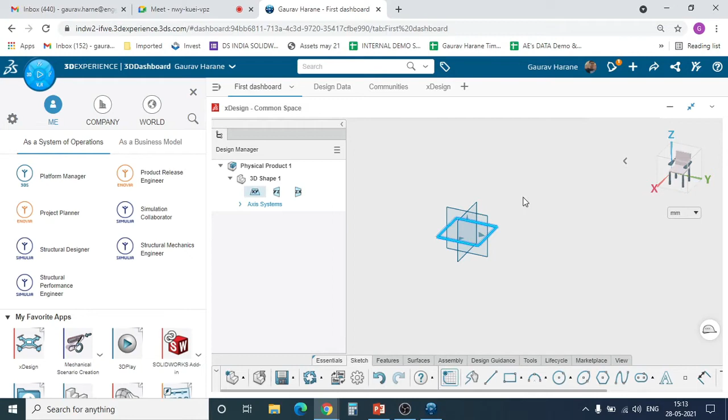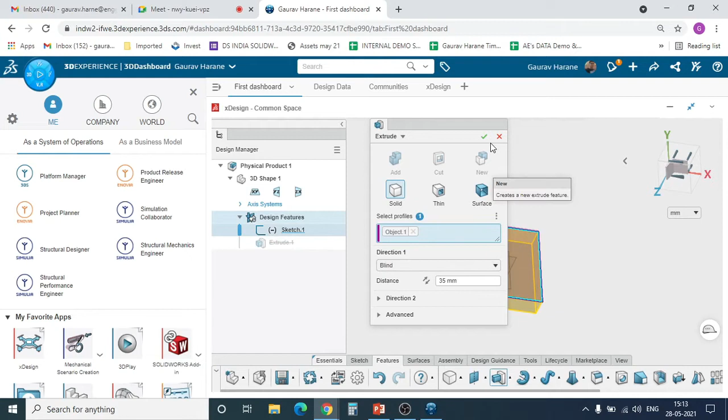You can upload your SolidWorks documents or parts to the platform, or you can create your part on the platform, download it and use it in the desktop, correct? So this is as easy as using SolidWorks. With all the features available over here, you can make use of all the commands, correct? And finally you can save it, or export it and use it in your desktop SolidWorks.

There will be a drive created on your desktop. Let me just open the drive. Over here we can see this is my drive of Engineering Technique. Anything that you copy and paste in this drive will be automatically uploaded to the cloud, right? You can just drag and drop any component that you want to preview. If you want to give any markups, you can do that, correct? You can play with the 3D Play app which is available to preview your component.

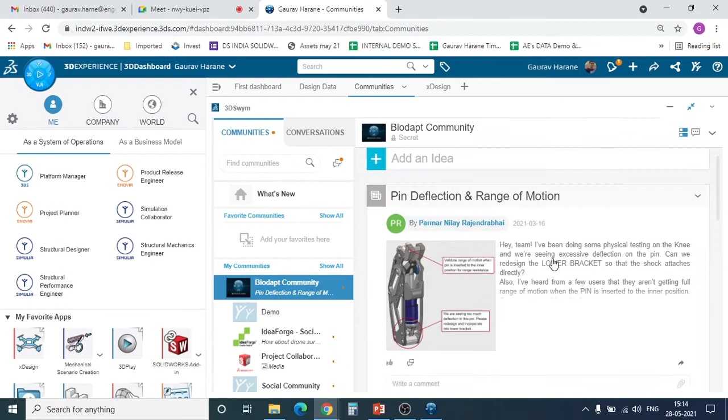You can also create various communities and share your thoughts with your colleagues, right? So these are various communities that were created. So the advantages are endless. Let me just jump on. Now we have seen the overview of the 3D Experience platform and how it will answer our queries while we are working from home, correct? By connecting everybody, every aspect of you, to the cloud.

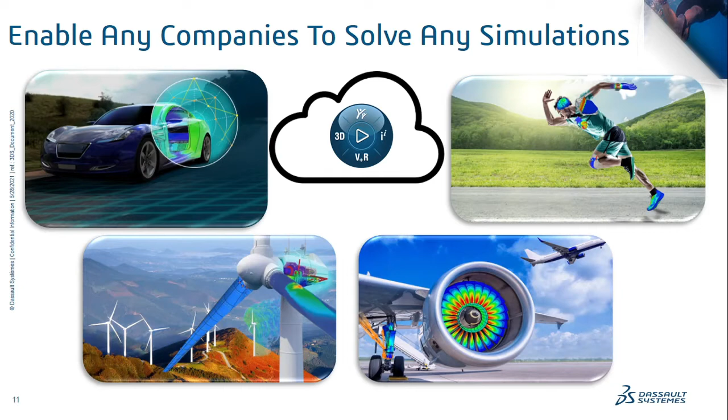Now SolidWorks Simulia represents the simulation category of the 3D Experience Works portfolio. We have seen there are 4 categories, out of which Simulia, which this webinar focuses on today, is covered under the simulation category. The goal for simulation is to enable any company to solve any simulation. Based on cutting-edge and leading technology, with Simulia all types of problems can now be solved by all types of users, whether a novice user just starting to do analysis, or an expert analyst. They can make use of the software and do their job.

Now, the market trend has never been stronger for simulation. It has been proven across the broad design, engineering and manufacturing industries that simulation helps launch new products to market faster, correct? I hope this is true, that simulation has helped most companies launch their products faster than those who are not using the tool.

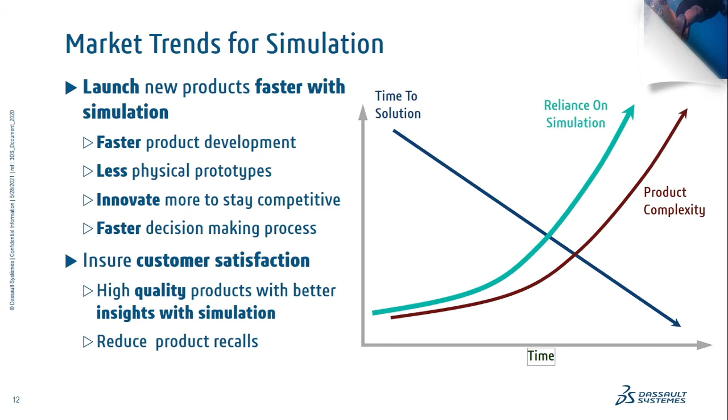The benefits have been proven and are multiple, like faster product, less prototyping and more innovation. Another key factor is customer satisfaction in providing not only innovations but high quality products, correct? Nowadays any product manufacturing company without the design department is not fulfilled. Likewise, with design department, the simulation or the analysis department is also very important, correct? So while designing, we analyze the component and then we take it ahead for the manufacturing.

Let me check. Yeah, okay.

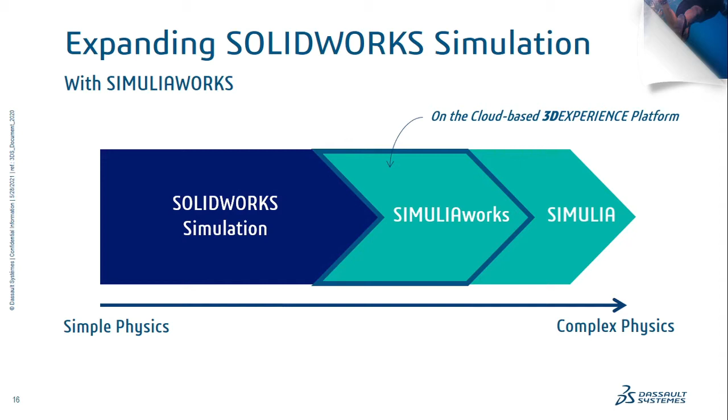Now physics complexity may differ, right? Starting from static, dynamic analysis, right? If you are interested in implicit or explicit, the types of analysis are different according to the physics complexity, correct? So there are various types of analysis starting from problem time magnitude to its non-linearity. The creep test which occurs over a long period of time, to hypervelocity or impact analysis, which is highly explicit in nature and which takes microseconds, right? So the non-linearity is different at each and every level.

So accordingly, different methods were generated according to the problem time magnitude, which are divided into implicit methods and explicit methods. So the explicit methods occur in less than a second of time, correct, like bullet impact analysis or detonation and blast or drop and impact analysis, which occur in a split second of time. While implicit analyses are our regular static analysis where the time duration is large for its occurrence.

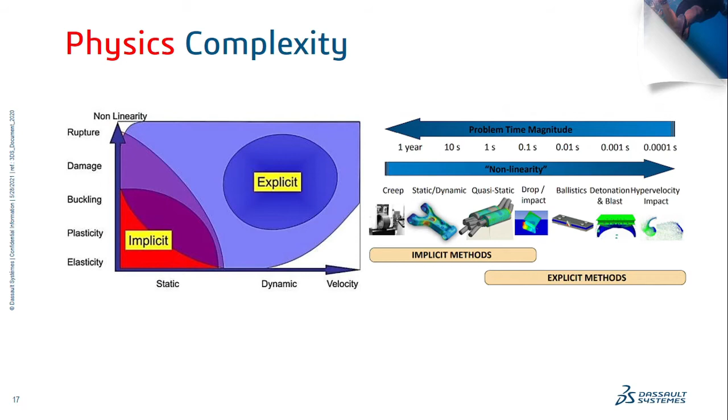Now, coming back to Simulia, let me just jump on to my platform over here. So according to the need, over here, if I select the Simulia role, then we have different apps available according to your need. And one of those apps is our structural mechanics or structural scenario creation, wherein you can create your analysis or set up your models and check the results.

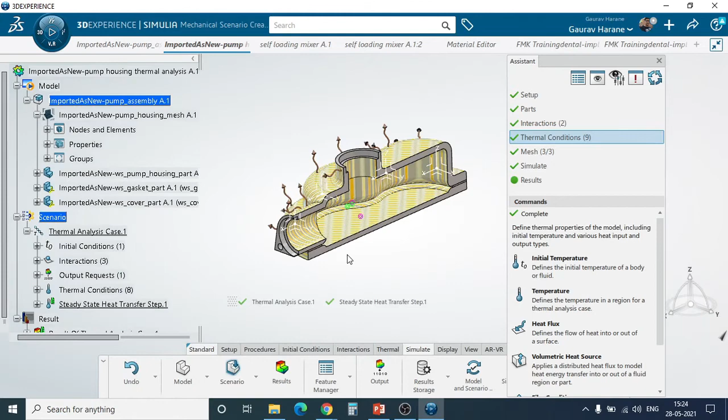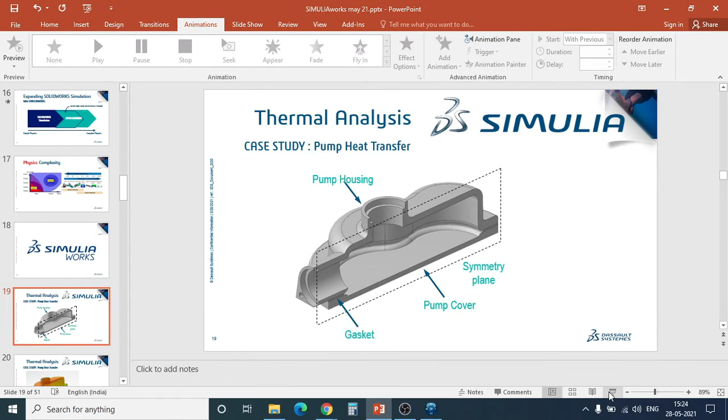So you can import not only SolidWorks but other neutral file format models also, taking an example of this thermal analysis. Now this is a gasket manifold, which primarily deals with the thermal analysis part. So over here you can define various boundary conditions starting from temperature, heat flux or heat source. All the modes of heat transfer, conduction, convection and radiation can be taken care of. And you will get the results accordingly. So this was one case study of pump heat transfer.

Now if we talk about a few more case studies or examples that can be done, take an example of this analysis of a self-loading concrete mixer arm, which is at the back end. So this is an automated vehicle in which the concrete can be poured into this rotating drum automatically. So let me jump on to my platform.

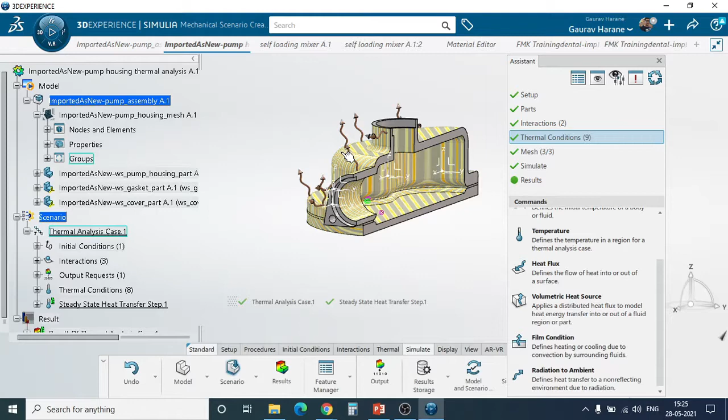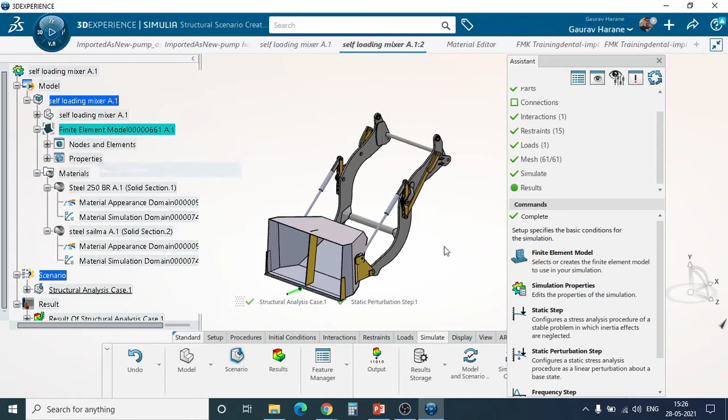So I have just taken the section of the arms where I am interested to check the analysis. And then you can set up all your boundary conditions. We have this very good assistant available, which will let you know whether everything has been done, whether restraints are applied, loads are applied, materials are applied, mesh is done. So if I just highlight the mesh for you, we have different meshes available starting from hex, tet and so on.

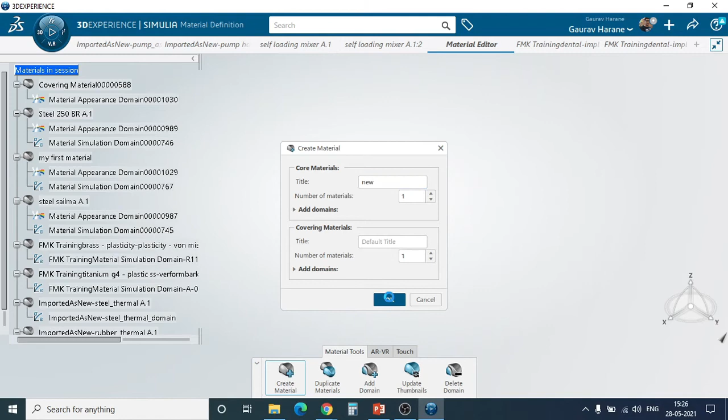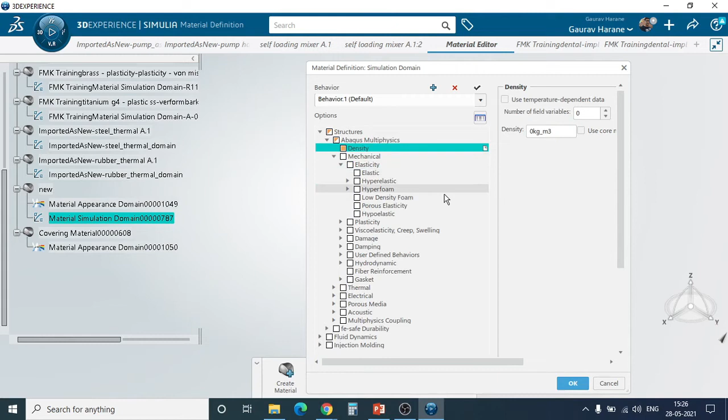And if I talk about material, you can create your material. For example, I will say material new, and over here in the definition tab you can provide all the necessary properties for structures. It can be density, mechanical, you can provide elasticity and so on. Plasticity is there. Even if you are into thermal analysis, it takes care of conductivity, specific heat and so on. So material creation and material property is very huge in this Simulia.

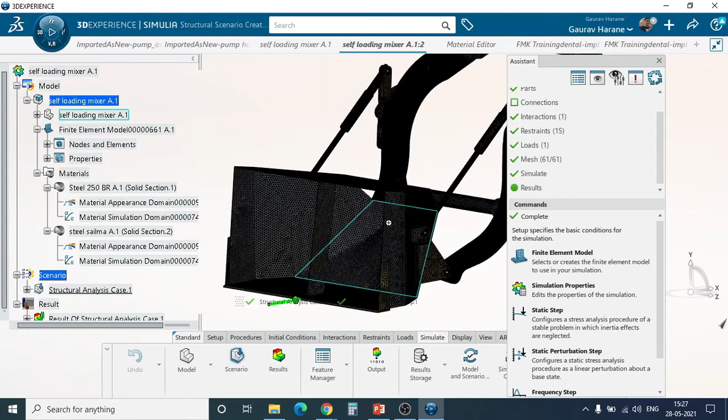So these are the few results. So let me just showcase you inside the Simulia tool. The only thing that is required for you is a good internet connection, and once your model has been loaded over to the cloud, you can work on this. So there is no requirement of setting up high-end machines. The IT overheads can be reduced in this.

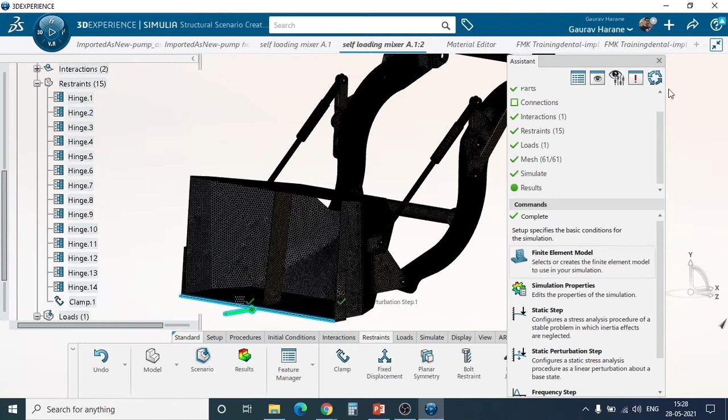So you can set up everything like the loads. I have applied the load over here, which will be the digging load. And different types of fixtures. If I talk about the restraints, you can apply bolt, hinge, and so on. If I talk about the load, all the different types of load are available. And if I talk about type, you can perform static step analysis, that is non-linear analysis. You can even perform static perturbation, which is your static analysis. You can do buckling, frequency, harmonic. Even implicit and explicit analysis can be performed with ease.

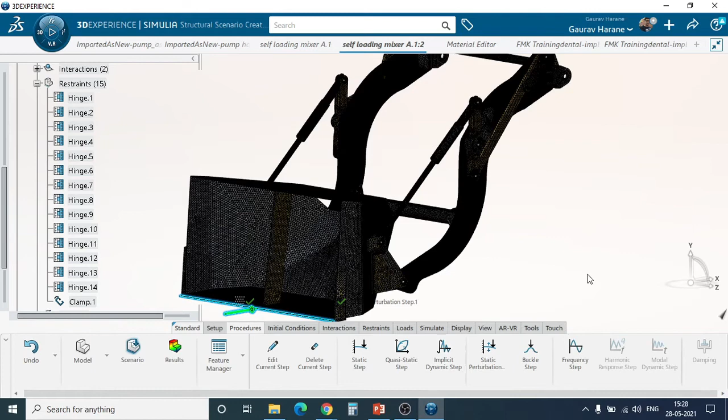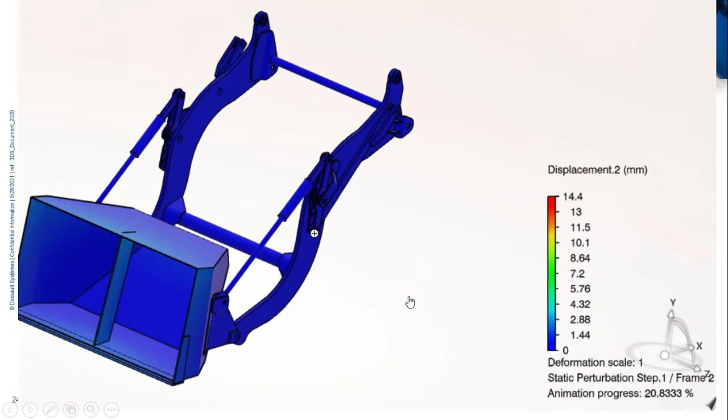So these are the few results. The displacement I got was 14 mm, and the stress value was coming at this bracket location, which is connected to this bucket. And good videos or animations can be created to check in which direction the displacement or stress is occurring.

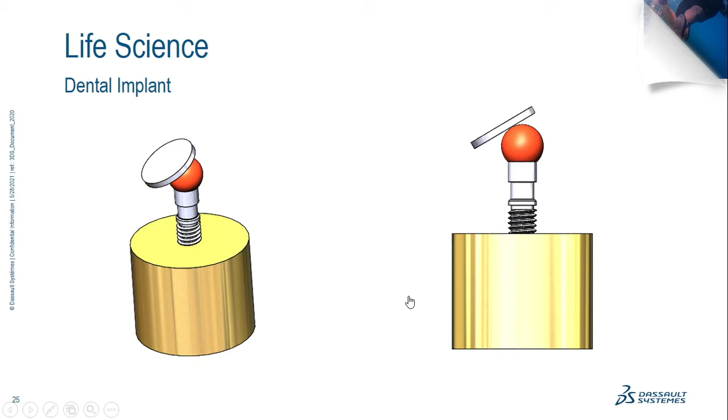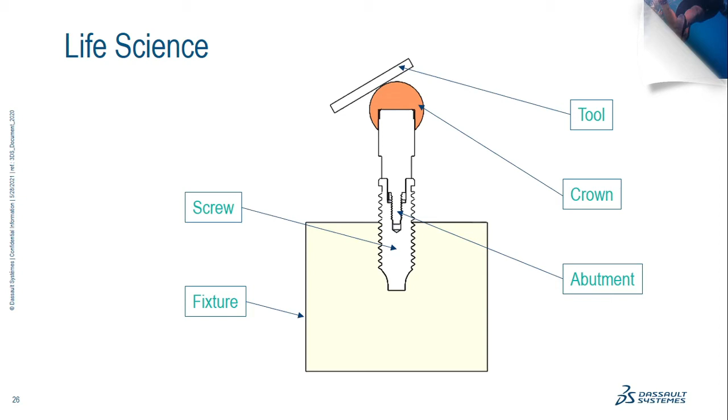Now let me go ahead and explain one more life science case study I have done for a dental implant. Now we all know dental implants are used in replacement of our broken tooth. So there is a screw which is first inserted, then there is an abutment which is helpful in gripping the crown. And over this crown we have the prosthetic teeth, the artificial teeth, which is mounted, and we have to check, when we apply the load on the tooth, whether it can take the load or not.

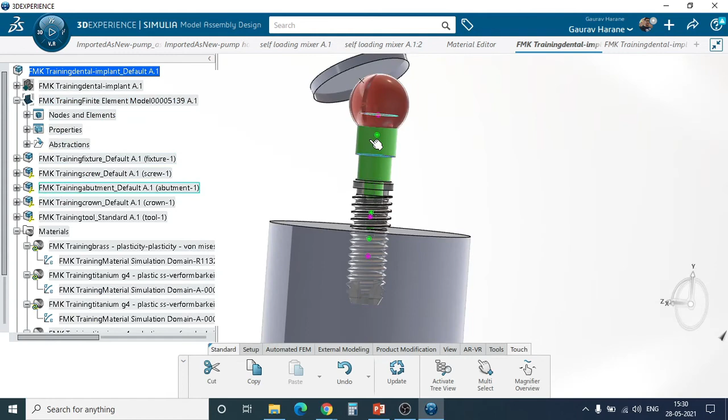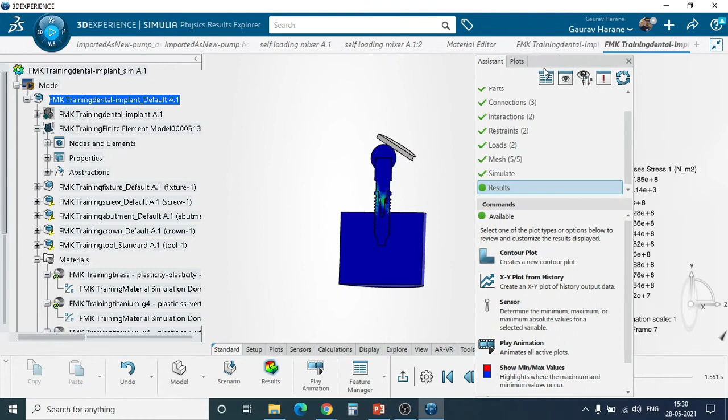So this is the simple model I have done. I have just meshed it. So let me just hide the meshing part, so that these are the various parts. At the top we can see the tool which is applying the load at an angle of 45 degrees. And let me just highlight the results. Now over here we can see the value of stress which is generated. Let me just clear the screen a little bit. Yes.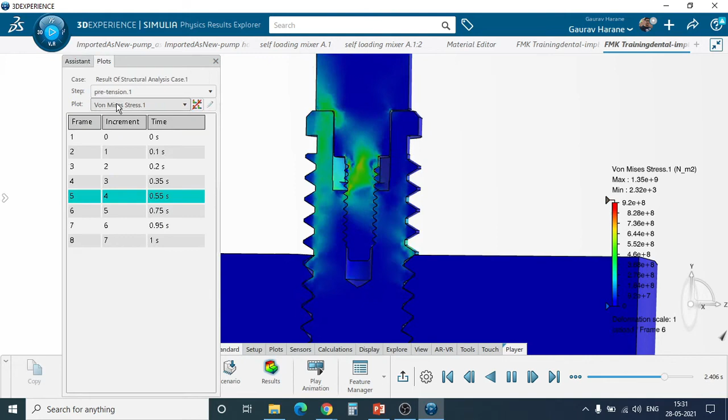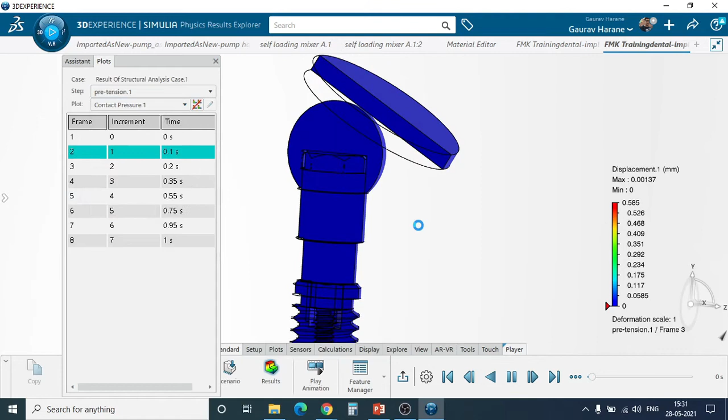So we can see when the load is applied on the crown via tool, what are the stresses being generated on the screw and abutment part where the grip is held. Various results like stress or displacement can be checked using various post-processing tools available. I have taken a section here - the maximum displacement is coming at the top of the crown because of the load applied from this tool. Likewise, if you want to check the contact pressure, how much contact pressure is coming.

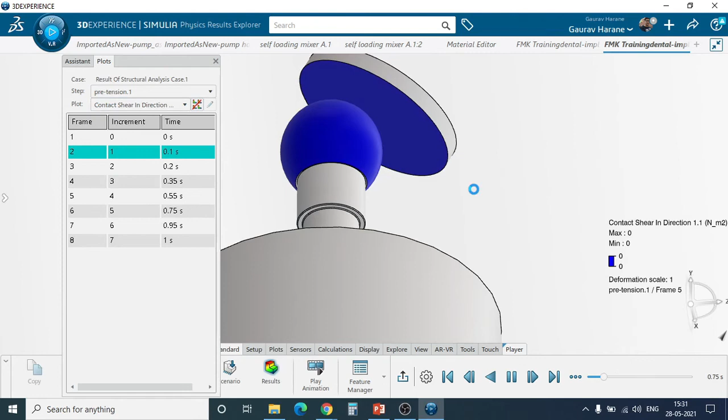Thank you. So if we want to check the contact pressure, n number of post-processing options are available, like contact shear, which would help you in designing the product with better efficiency.

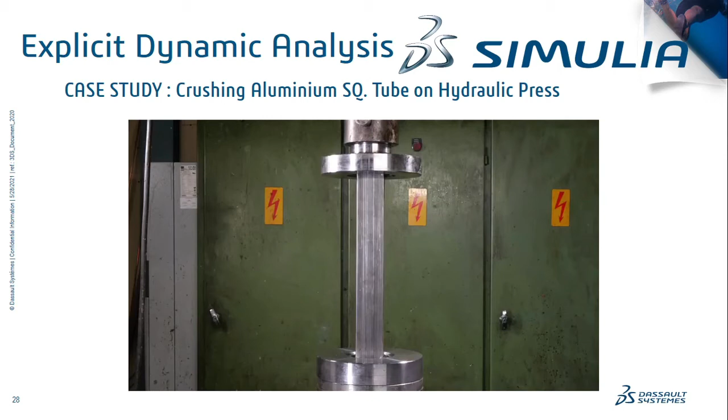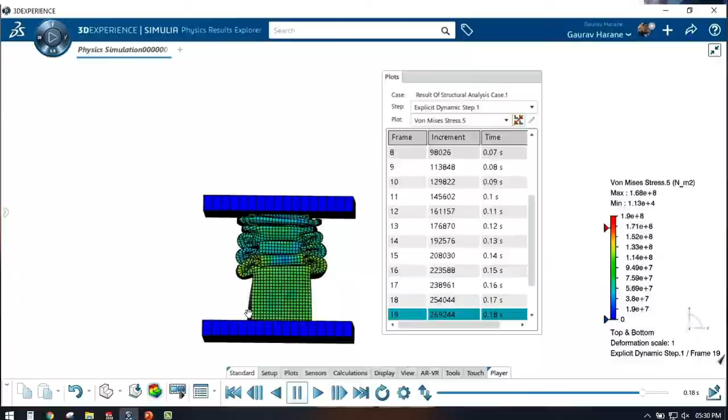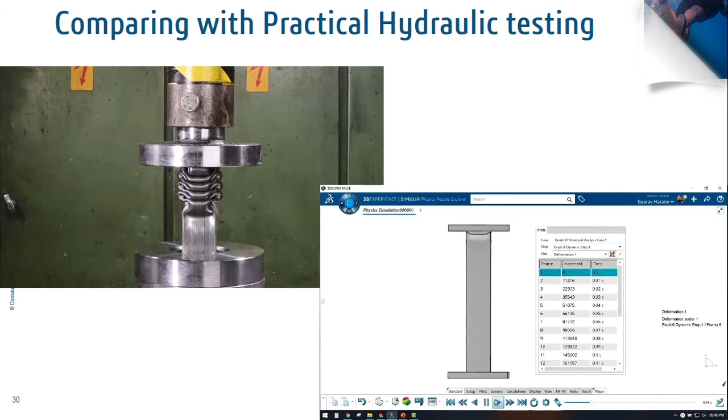A few more case studies I had done, like crushing an aluminium square tube on a hydraulic press. This includes very complex physics when we crush the aluminium rod - it's highly non-linear and explicit mode, which can be done with ease in such high-end Simulia tools, and the results are quite good. Here I have compared practical hydraulic testing with the simulation tool and got pretty good results. I have taken a section to check how the folds are occurring when this aluminium tube is crushed, which gives a good idea of how complex problems can be solved.

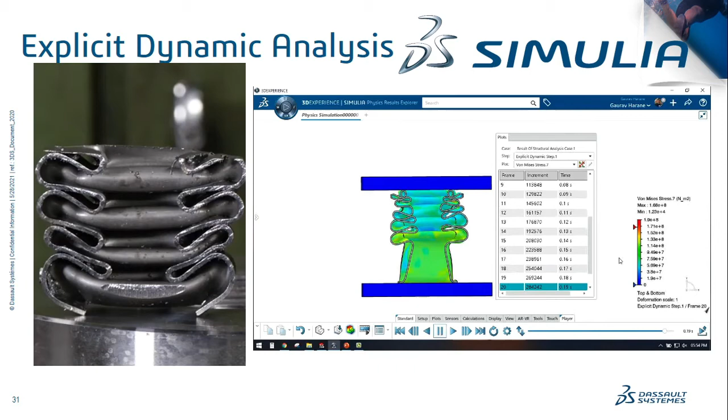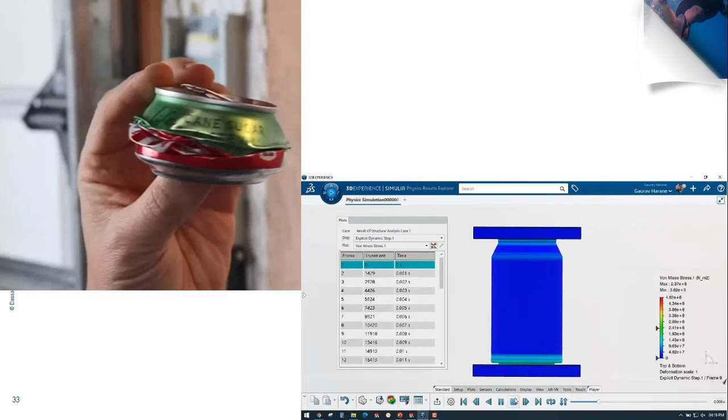Another case study is crushing an aluminium soda can - we all know this machine which is used for crushing it before it's disposed of, which again requires highly non-linear and explicit solvers. The same thing was carried out inside Simulia, and the results were again pretty good.

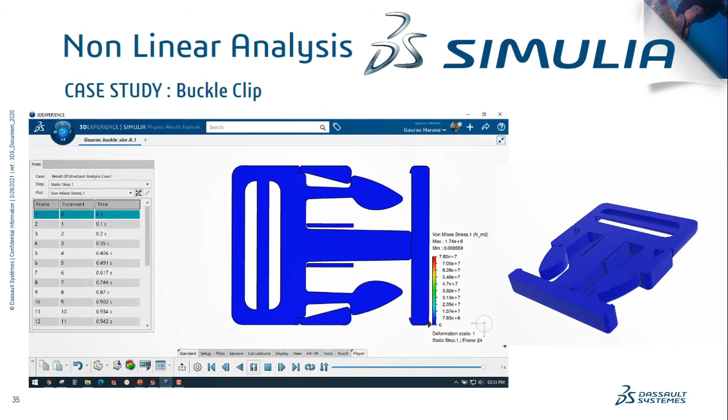Or even non-linear analysis like a buckle clip, where a high level of contact is required - good contact sets are required while performing such type of analysis. So these are a few of the capabilities.

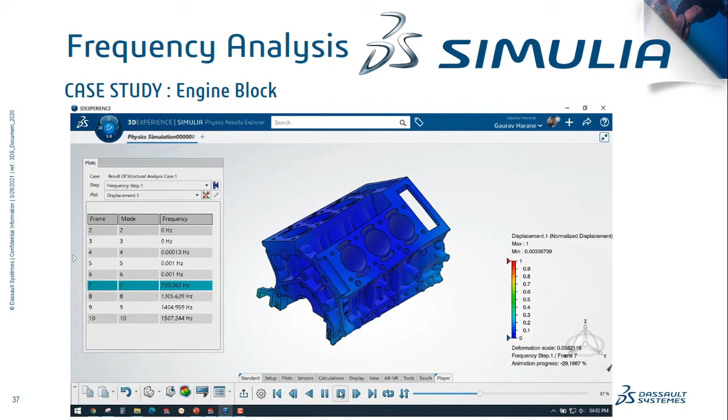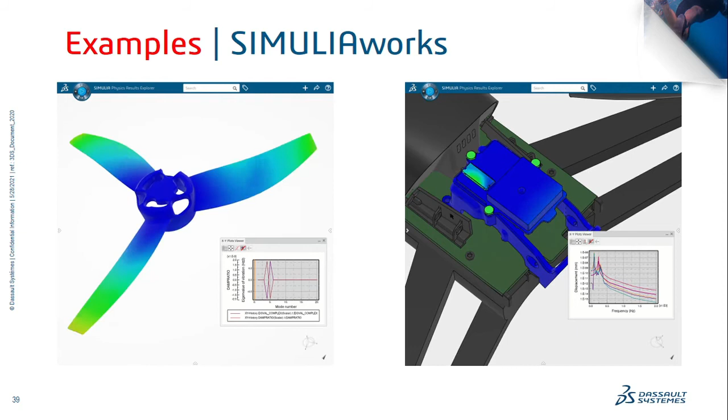Or if it's a high rubber or elastic material, such kind of analysis can also be carried out within the tool.

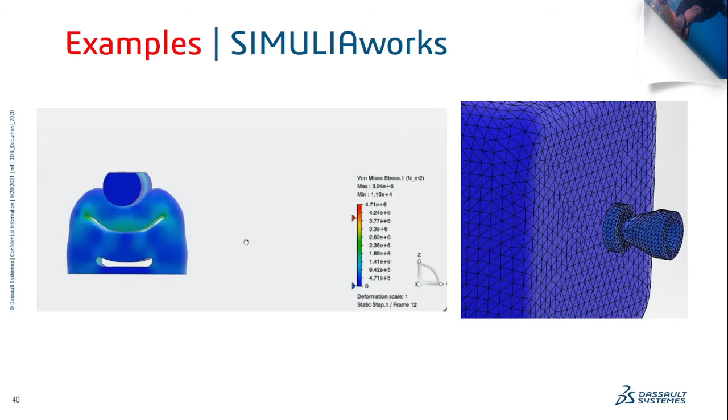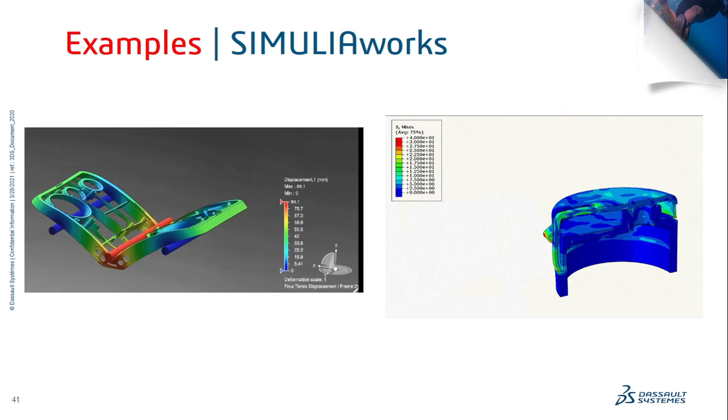Now this is an example of a casing. On the left side what you are seeing is a 3-point bending test of a casing component. Instead of doing it practically, you can do it within the tool and be sure whether it could fail or not, or whether any design changes are required before finalizing the product.

So the capabilities are endless - it includes explicit and implicit solvers, as well as 1D, 2D, 3D meshing. A wide range of materials are available. Advanced post-processing tools are available to visualize your results, including analysis, material rendering and high performance visualization. And of course we have the option of cloud computing also - instead of investing a lot of money in a system for performing the analysis, we can run the simulation directly on the cloud. So instead of investing money on the system, we can invest it on the tool, and it can be directly run over to the cloud.

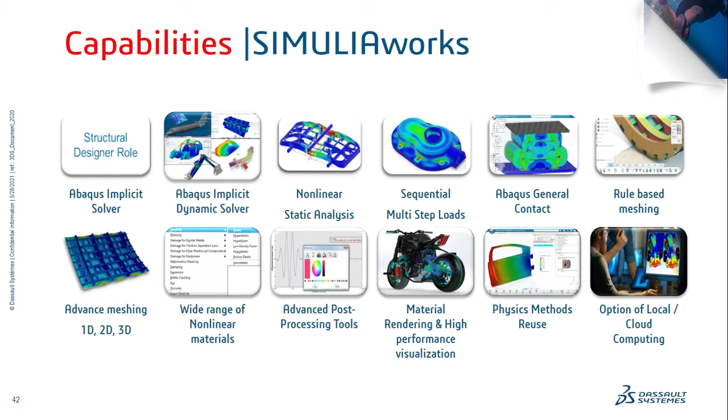Now one last question which might come: when can we switch from SolidWorks simulation to SimuliaWorks? When means why and how. So whenever there are problems with large deformation or strain, when deformation is more in your product, at that time we can switch, or when there's large strain or advanced contact conditions required, at that time we can switch to SimuliaWorks. We have additional meshing elements and features, hex mesh introduced, fast solve time and advanced analysis. So for these reasons, we can anytime switch to SimuliaWorks.

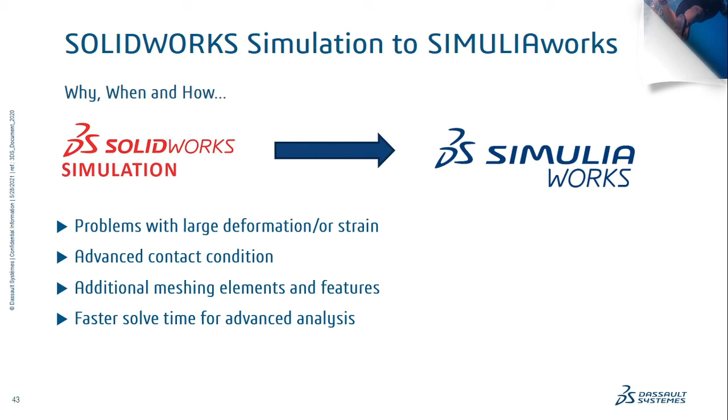Now, what are the key takeaways from this tool? We have tried to create a designer-centric user interface, thanks to the guided user interface and the CAD associativity that allows you to quickly explore various designs. Yes, most importantly, being on the cloud reduces IT overheads and infrastructure cost - as you know, the computing cost reduces.

Again, it is integrated. Integration of CAD and PLM is key value to users, where they can continue using SolidWorks, but whenever they want to make a design change, it is not a problem at all. It is also scalable across various skill sets. We have both designer-centric UI and expert-centric advanced options depending on the stage of product development.

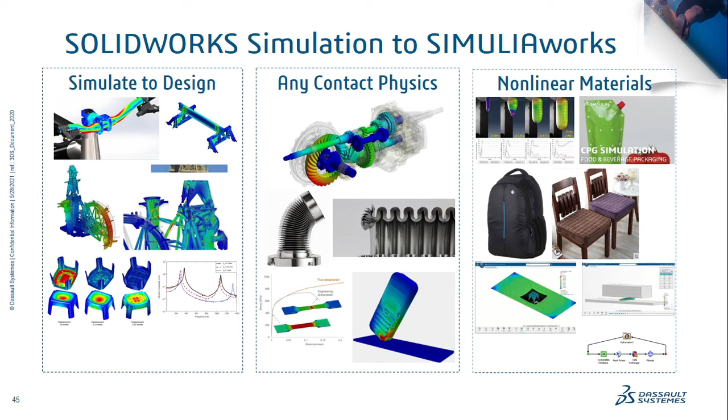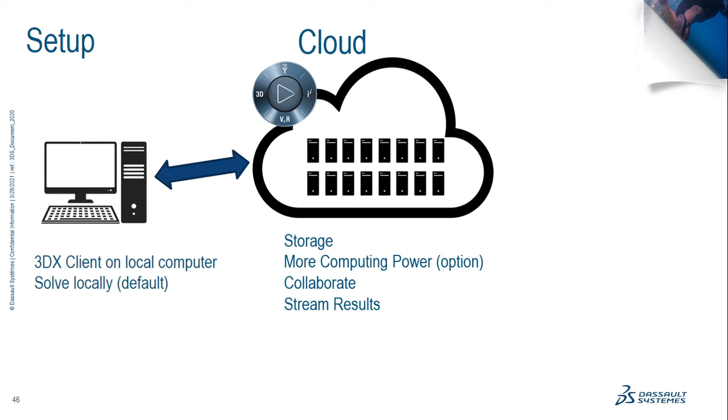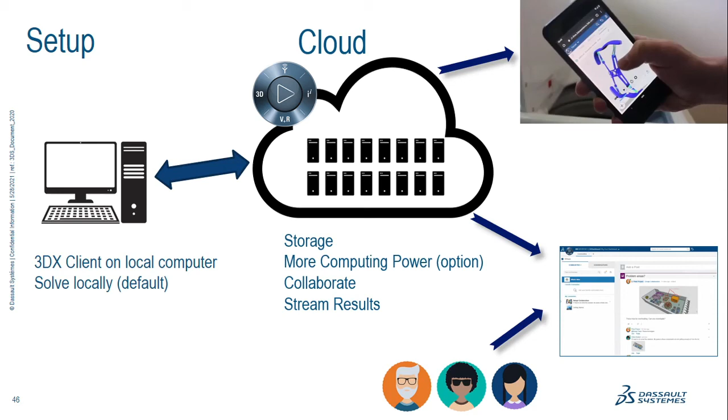You can even use it on your mobile phone. If you want to check the 3D CAD model, you can open it on your mobile as well, and you can comment on it, give a few feedbacks directly from your mobile, or you can open it on the web also using Chrome or any web browser you have, and you can stay connected anytime, anywhere.

Now, finally, I would like to conclude that the 3D Experience platform is a fully cloud-based collaboration solution designed for SolidWorks. All of the infrastructure is maintained by Dassault Systemes, which means you can be up and running in minutes, as there is no server to configure and maintain. No VPN is required, all of which can significantly reduce your IT overheads while providing a secure environment for storing design data.

You and your design team can quickly and easily create, securely store, review, and share SolidWorks designs, and you can do all of this while working from home or in office. The 3D Experience platform, if I may say, is a big ocean, where your designing can be done, your governance can be done. You can manage all your parts and products within the platform. Even you can do your analysis. So each and every field of your company, whether marketing, designers or analysts, can make use of this tool and get connected together.